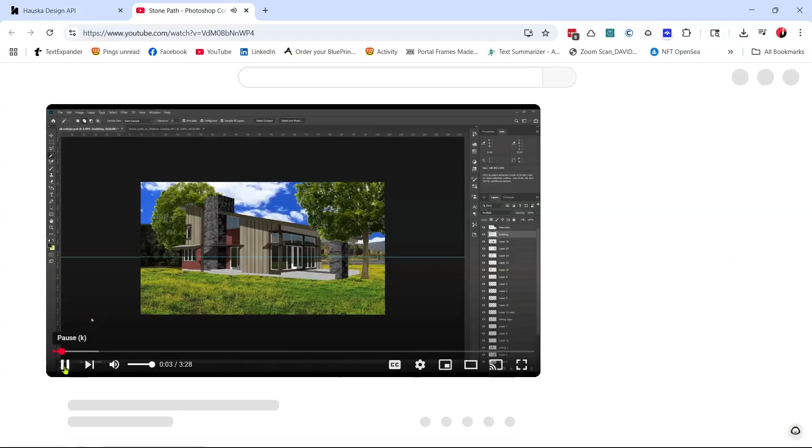My experience, like I said before, isn't that great with Photoshop, I only know how to use a few tools. One thing I struggle with in written instructions is I don't know what icons go to what. Fortunately, when Perplexity gives you an answer, it leads you to where on the internet it got that answer. In this case, it's a YouTube video where somebody takes an illustration of a rendering and wants to add a stone pathway up to the house.

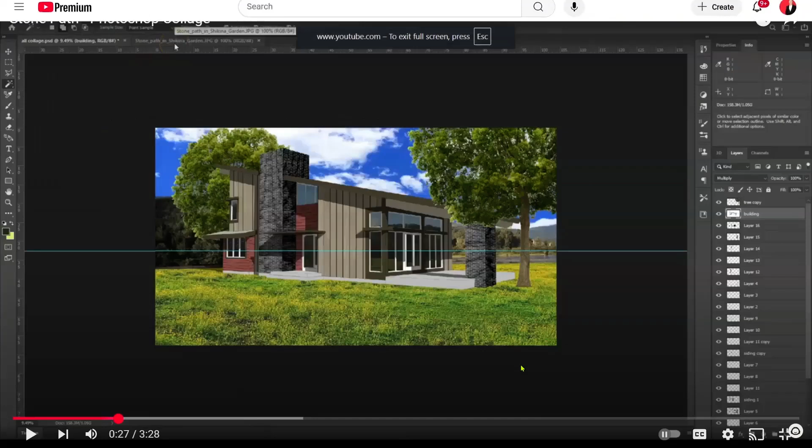So here's the rendering, and they take you through step by step. I didn't include the audio, but I'll include the link to this video in the notes below so you can go check it out. Basically, they go in and mask out a stone drive or walkway found in another image, using the lasso tool.

They create a boundary, which is kind of like cropping the image, but in a way that the AI identifies the individual item within the image you're trying to take out. It'll make that a separate layer in Photoshop so you can lay one image on top of the other. Right now the instructor is tracing out the driveway, and when they finally get to the end, you'll see how it creates the layer they're looking for.

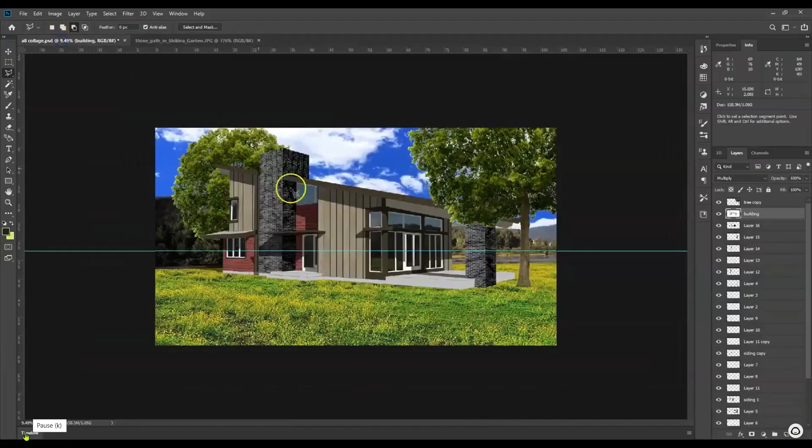You do have to be somewhat precise when telling the AI what you want to take out of the image, but you can see at the end they just drew one long straight line, and the technology understood what they were looking for. So now we're adding that walkway to the original house rendering, positioning the layer and stretching it out, and bam, there you go—a stone walkway right up to the house.

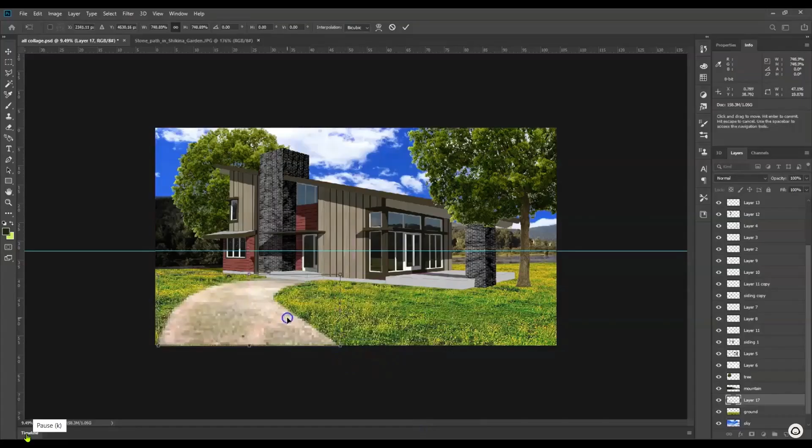In this case you can kind of tell that it was generated. I didn't take the time, because it took me a long time to learn how to do that in Photoshop, but here's what the result was of my labors.

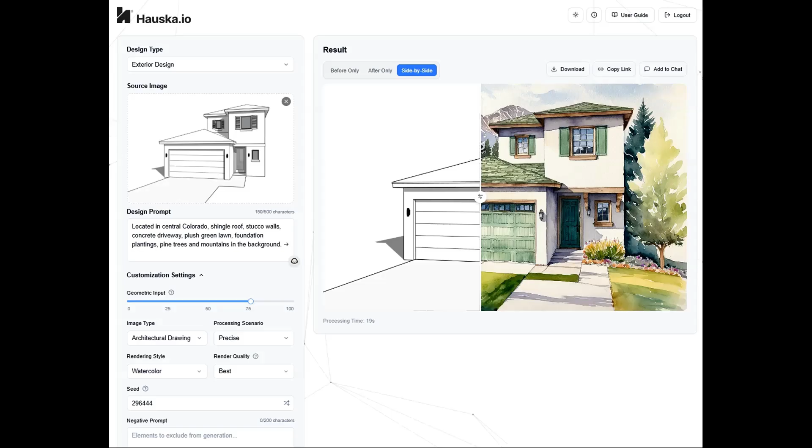I asked Hauska to create a rendering for me that's in watercolor, and another of that same model asking for photorealistic rendering. And then here I ask Hauska to take an existing image and just basically make it to where it's a nighttime shot.

But now I'm going to get into a little more detail with the drop-down menus. For example, one of the options is that you can choose virtual staging instead of just interior design. Then at the bottom, once you've clicked that, you have more options and can choose which room it is and which style you want. Looking at the cabinets, I thought about traditional, but it's probably more modern.